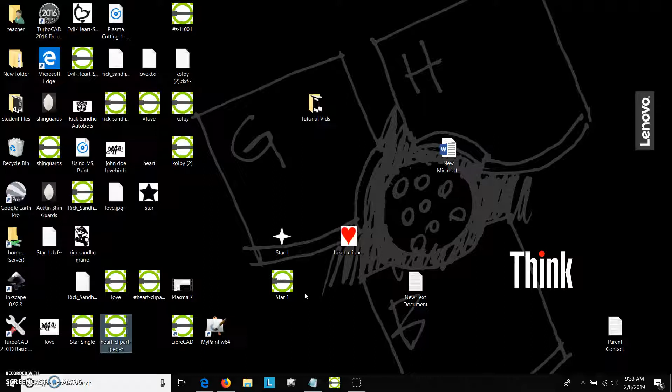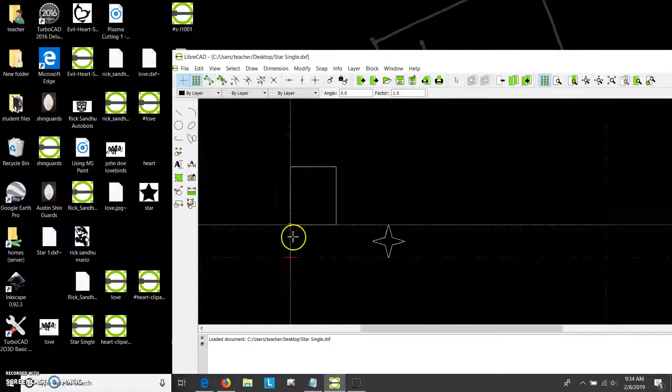I'm going to start by opening up LibreCAD, and I'm going to drop my first object in, which is a star, and then I'm going to add an additional object, which I've shown in previous videos. So I'm going to import a block, and that's going to be the heart. And let's just drop this in place here. I'm going to turn my grid on, drop it at the same height. There we go. Alright, so there are two different sizes, and instead of sizing them down,

I'm going to start by drawing the rectangle that is the right proportions. Now if you take a look at this grid, we can use it to help us draw something that's 4 units high and 12 units long, but when we look in this bottom corner here, there's a scale here. It says 100/1000. And what that means is when you look at these grids spaced out here, each one of these big pieces of the grid represents 1,000 inches, and these little ones represent 100 inches. So it's telling you what you're looking at.

If I zoom in, you'll notice at some point this scale will change. Right there, now it's telling me that these big squares are 100 inches, the small ones are 10 inches. And if we keep going, eventually you get nice and close, and it shows you that each one of these little squares is an inch, and that each one of these bigger squares is 10 of those small ones, so that's 10 inches.

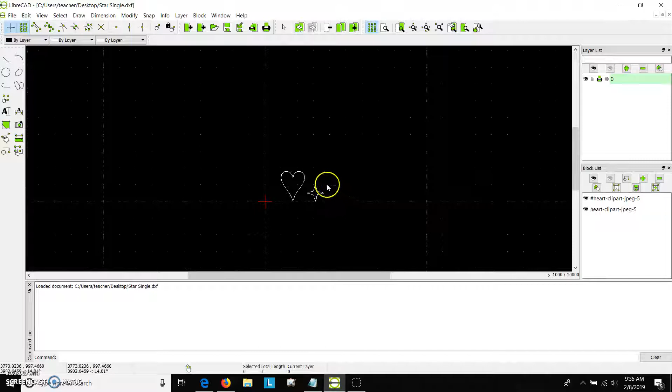So if you truly wanted to draw something that was exactly the right size, you could do so, but the problem with that is it would be a tiny little 4 inch tall by 12 inch rectangle showing up on this page. And how would we scale these things down easily enough so that we could land on that little tiny rectangle? It's frustrating. So I'm going to show you a different approach.

We're going to leave these things here, and we're going to just choose the squares that are on the page. Even though they're not the life size that we want, we're just going to use them to our advantage here. So I'm going to start by making sure that just my grid snap is on, and I'm going to attempt to draw a rectangle here. So we choose our line tool, and when we click on it, all of our options come up. There's a rectangle, and I'm going to draw from here.

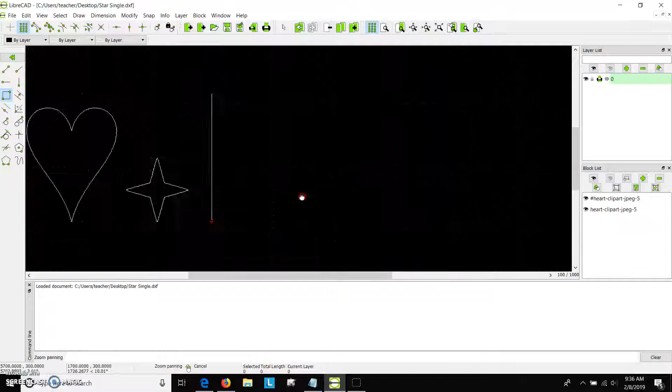I'm going to draw, let's go with 2 units up, which means that I'm going to have to go only 6 units over. So 1, 2, 3, 4, 5, 6. And there it is. Oops, that was a mistake. Let's try that again. A rectangle, 2 units up, 6 units over.

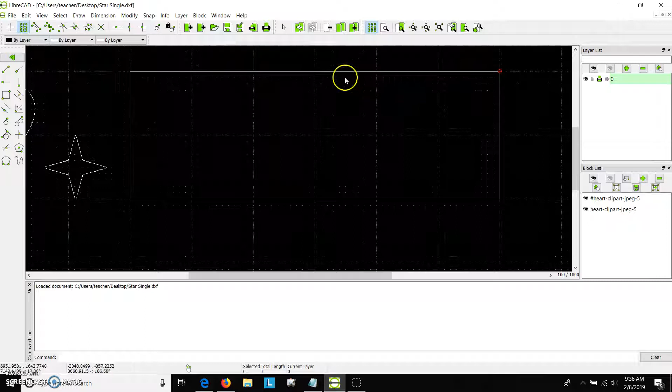Now that represents the right proportions, because if you take a look at a normal 4 by 12, that means it's 3 times longer than it is tall. And although this is 2 by 6, it's still 3 times longer than it is tall. Okay, so it's just about maintaining the right ratio. A little bit of math might be involved for some people in order to do that properly.

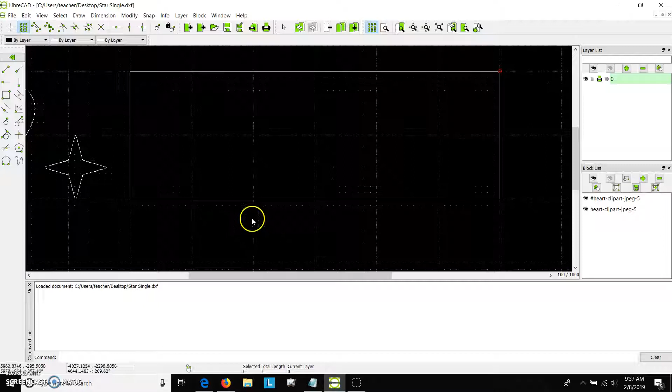But this rectangle represents the approximate shape of the piece of metal that we need. And so we've drawn it bigger than life size. I mean, if we were to take our ruler tool right now and measure it, and if I measure from this point to point, it's telling me that that's 2,000 inches big.

So that's not how big we're going to cut it. We will scale it down in a bit here. We've drawn it at the approximate shape that we need. Well, it's actually the exact shape that we need, but it's just big.

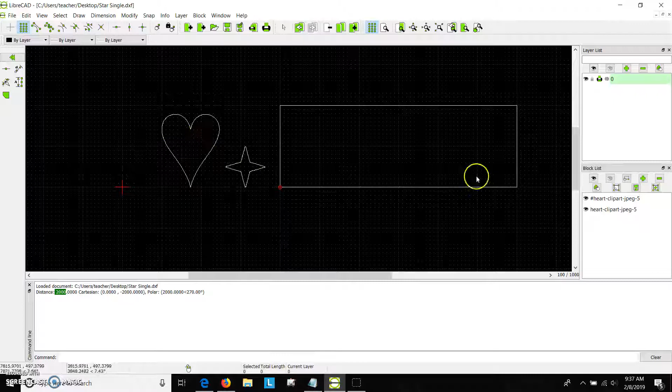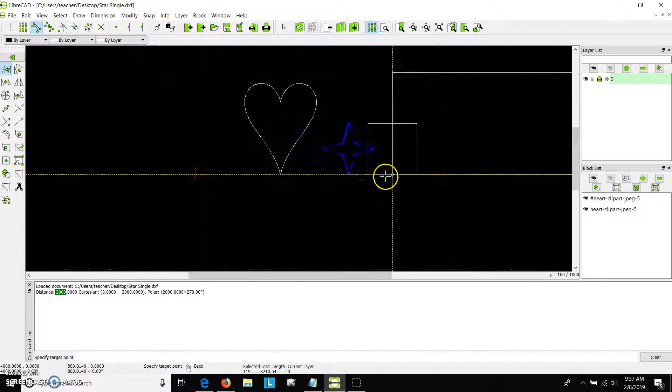We're going to bring these objects into it now. I'm going to select this star and use the modify move command, and it's asking me for a reference point. I'm going to choose the bottom tip. I'll turn off the grid and choose the bottommost point here. Now it's asking me for a target point, so I'm going to turn off this snap, turn the grid back on, and choose my target point somewhere in the middle of the object, and we'll place it right there.

And I'm going to delete the original. There we go. I think that's actually not a bad size for this project, so I don't think I'm going to scale that up at all. I'm going to keep that as the size.

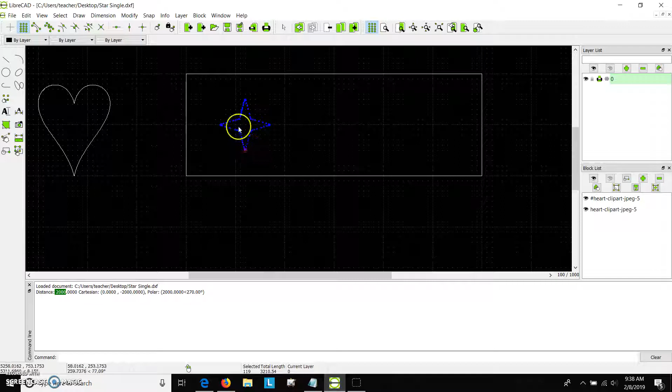I'm going to copy another one. I think I want to have a total of 4 shapes in this project. So let's bring this guy in here. You can just grab and drag too. Sometimes that works. Oops, let's undo that. Hit escape to clear the selection box, and then go ahead and grab and drag.

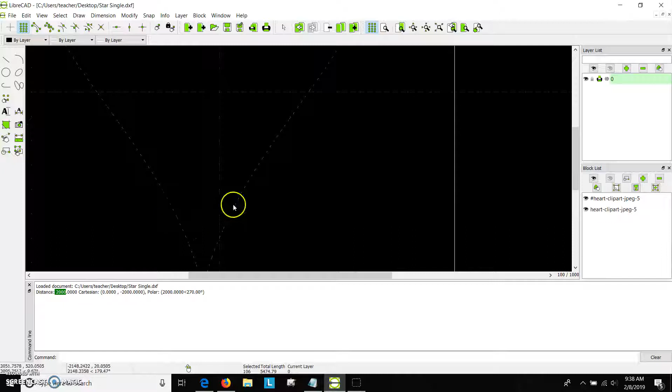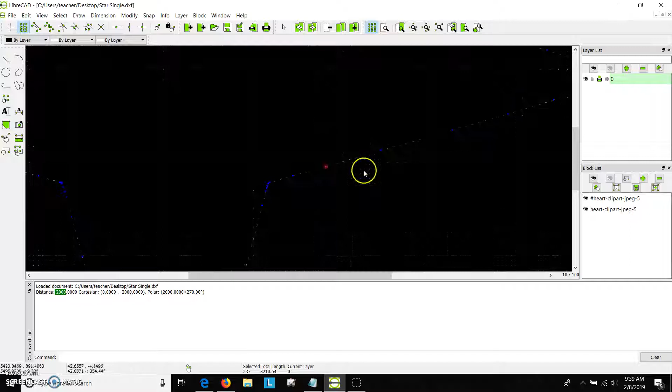Grabbing and dragging works as long as it is an object that is all red like that. If it's an object that lights up with blue like this one, and you decide to grab a blue node, what ends up happening when you try to drag this is you're going to skew it. See, it stretches all of those dots and wrecks the object. So when you're grabbing something that does have blue dots in it, make sure you grab from the red line, and then as you make movements, you're actually moving the object, not stretching it.

Alright, so let's do that. Let's grab the heart, and there's no blue dots, so I'm going to bring it in. And when I look at this now, I just feel that heart's too big. Okay, I want to make that heart about the same size as this star.

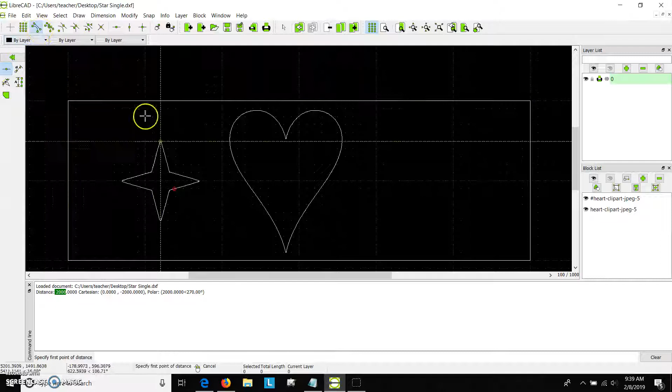So let's measure the star. We'll use the measure tool, point to point, and we will choose just to grab that piece of geometry there. So we'll use the endpoint snap tool setting here, and that's telling us it's 992.

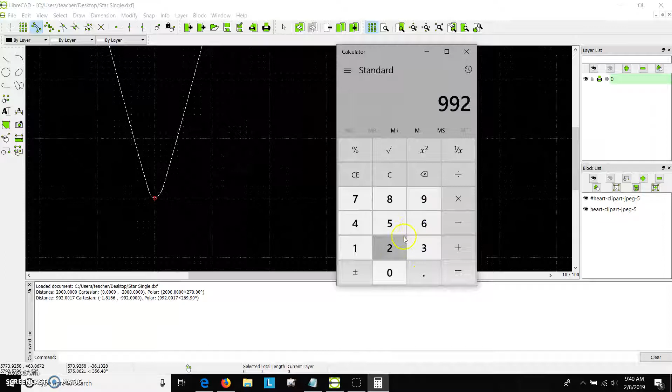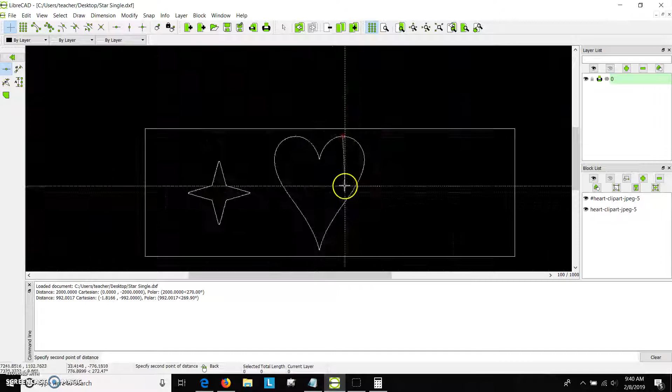Alright, so if we're going to scale down, let's get our calculator out. We have the small number on top, so 992 divided by, and let's measure the heart. We'll use our measuring tool, point to point, and this time I'm just going to use a free point here, because I'm going to measure right at the top, about there, all the way down. Now I'm going to force it to go vertical. There we go, a vertical snap, and I'll measure to there, and it's giving me 1781.

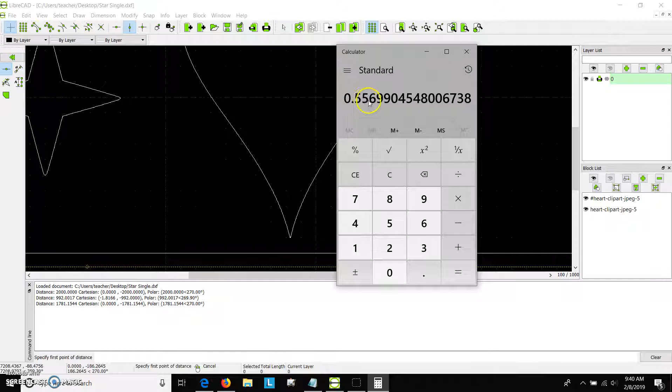So 992 divided by 1781, let's go back. So divided by 1781, and we need a scale factor of 0.5569, or 0.557. Let's use 0.557.

So let's scale this heart down now. I'll hit escape to get out of all these menu options, turn off all these snaps, select the heart, and modify, scale, and it's asking for a reference point, so I'm going to snap to this. I'll snap to the tip of the heart.

There it is, and 0.557 was what we wanted to scale, and we want to delete the original. Let's do it. There it is. So it's shrunk it down.

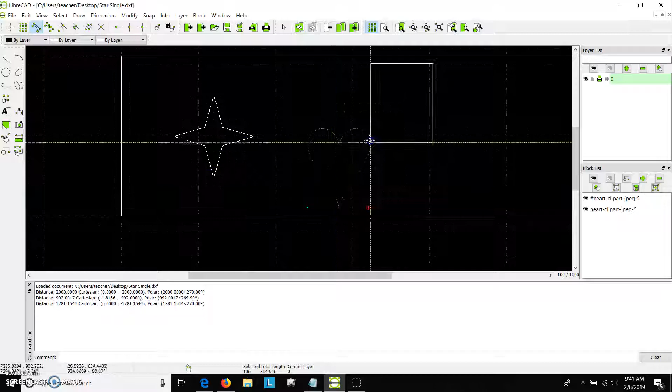I'm going to have to move that now. And I'm stuck on this sort of snap. Let's turn that snap off. Let's turn the grid on. And let's line it up with this guy here, and force it to stay.

Actually, we can just snap over. That works, right there, done. Escape out. Now that looks pretty good. They're about the same size, and all that's left to do is maybe copy a couple more out.

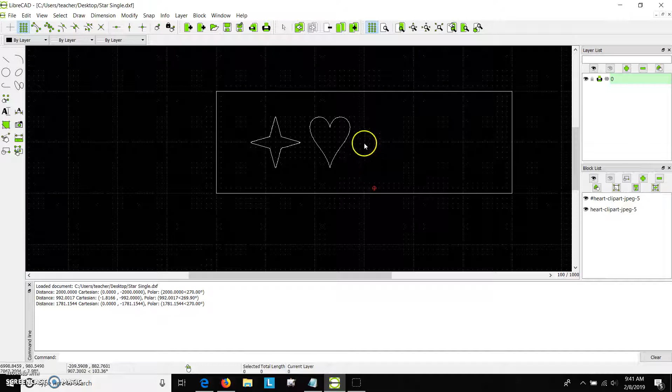I want to get the spacing right, so I'm going to visually use this center line of the entire rectangle and try to space these two out equally. Maybe this just needs to move, so I'll go modify, move. That's another way to move things. I'll use the grid snap and just move it over. Alright, that looks a bit better.

Maybe a bit more. Modify, move. Use the grid snap one more time. Okay, I'm happy with that so far.

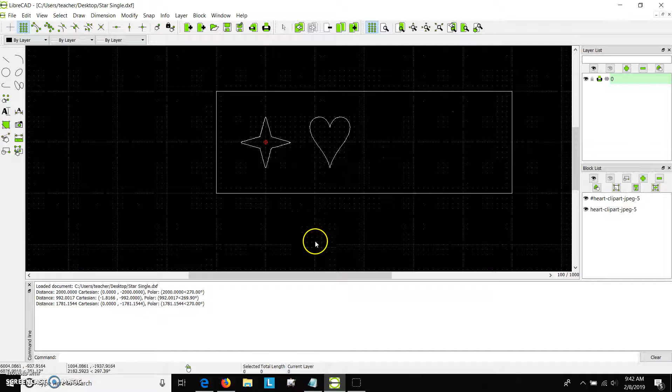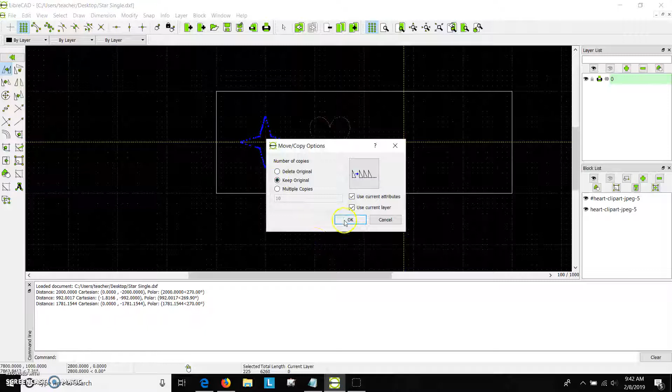I think I will copy both of these at once and bump them over. So I'll select them both, and I'll modify, move, copy, and choose this as the reference point, and move them over to about there. I'll keep the originals because I need to, and there we go. So we've copied out 4 of those.

Now from here you guys can take your time and tweak each one of these objects, moving it left and right. Remember that if you want to move it only horizontal without changing the height, because sometimes you slip and move the height, then you just force this restrict horizontal snap on.

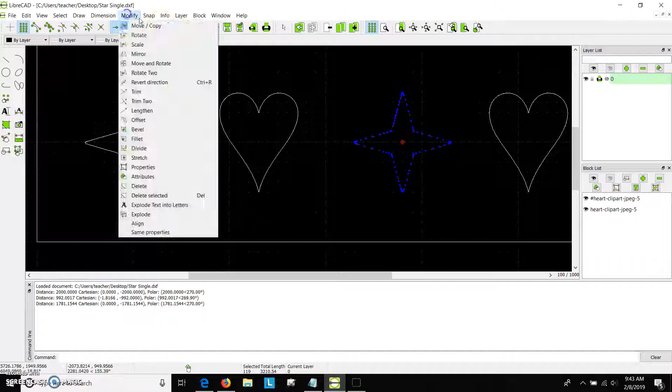Now when I move, go modify, move, no matter where I grab it, I can't actually lift it, I can't move it vertically, it's forced to stay horizontal. Alright, and I probably should have deleted the original, but I'll just do it manually. There we go. Okay, so you get that, you got to move them around.

Now this whole entire thing looks like the right shape for the project, but we know that this thing is massive, it's way bigger than the project itself. So if we were again to go and measure, you know, I'm going to actually force these to become a block now.

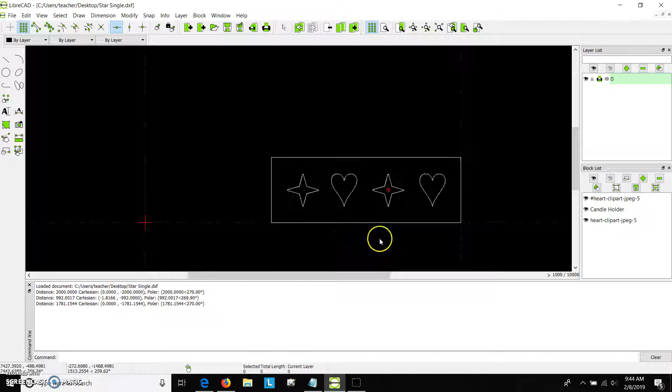So I'm going to highlight all of these and use the blocking command to create a block. It's going to have a reference start point, say, in the corner, and I'm just going to call it candle holder. There it is. Now this is a block, which means it's all one object and it moves as one.

That's a handy thing to do so that when you scale it, you don't distort anything and mess up the positioning. So I'm going to scale the whole thing as one object. I'll select it, and first I'm going to measure. So measure, using object endpoints. Let's turn off that snap. There we go, from there to there is 2,000 inches.

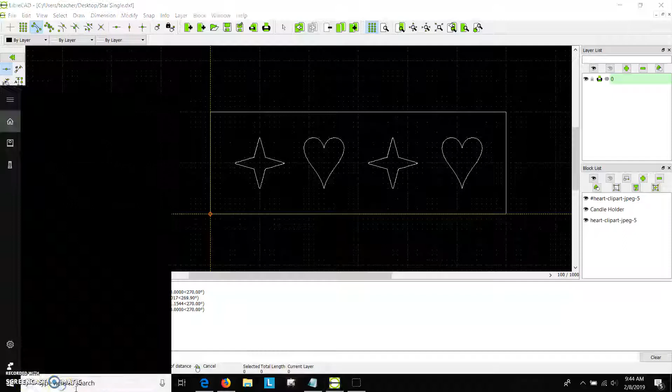And what I want is 4 inches. So going to the calculator, I put the small number on top. I want 4, and I'm going to divide it by 2,000. So the scale factor is 0.002.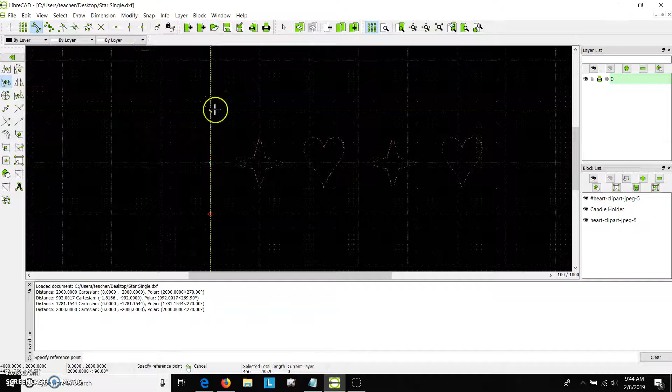Let's do the scale. I'm going to select my geometry, go modify, scale, choose a reference point, and scale it to 0.002, delete the original, done. Now it's gone. You see, that's why we worked on this whole thing as a large object and scaled it down after, because how are you going to shrink hearts down to a little tiny box that you drew?

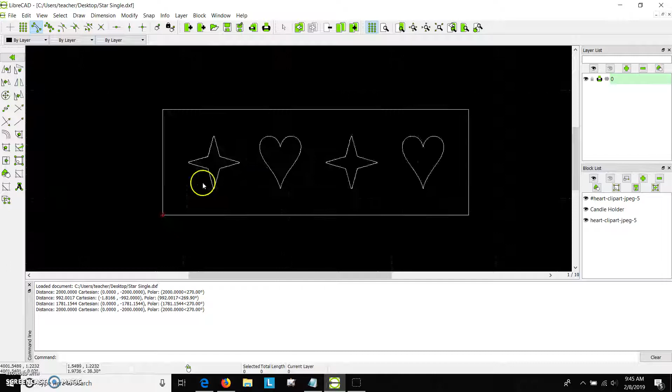If I zoom in with the mouse wheel, here's our project. Let's double check one more time with the ruler. I'm going to snap to these endpoints. It is now 4 inches tall, and I mean, I can even count.

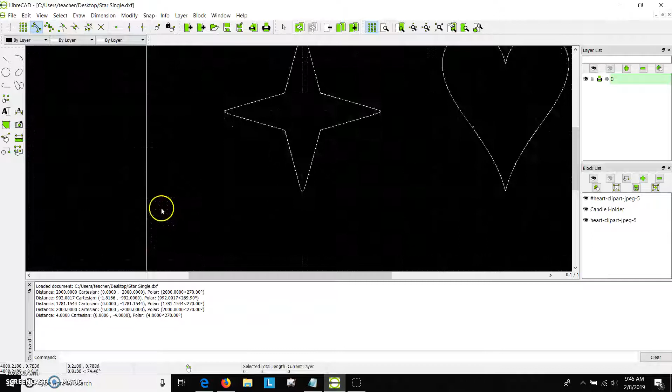You see 4 boxes, and the scale is, each one of these little guys is 0.1 of an inch, and each one of the big guys is an inch. So there we have it. So this is 1, 2, 3, 4 inches, and this is 12 inches.

So we are complete. We're going to file and save this project as candle holder brick Sandhu on the desktop, and we are done. This project is now ready to take into the back room to cut.